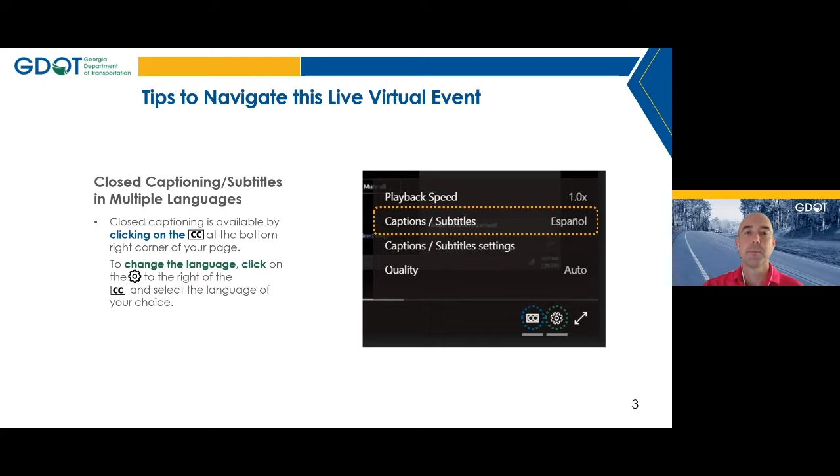Thank you, Kyle, and thank you to everyone for joining us today to learn more about the US 278 and Old Mill Road improvement projects. Let's get started.

As Georgia continues to grow, GDOT is committed to responding when economic development opportunities are presented, or when there is planned growth that requires action to ensure safe and easy access for the traveling public. The US 278 and Old Mill Road improvement projects were developed with those considerations in mind.

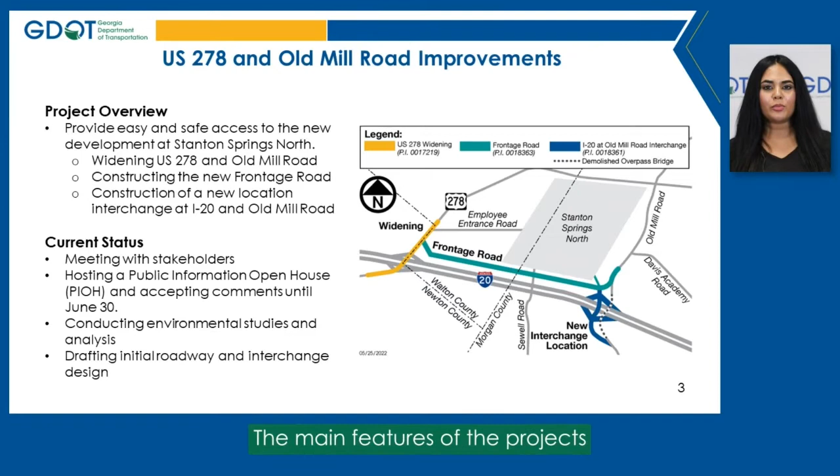These improvements are in response to an economic development opportunity that will increase traffic through this corridor. This package of projects will provide easy and safe access to the new development. The main features of the projects include widening of US 278 and Old Mill Road, constructing the new frontage road, and constructing a new interchange at I-20 and Old Mill Road.

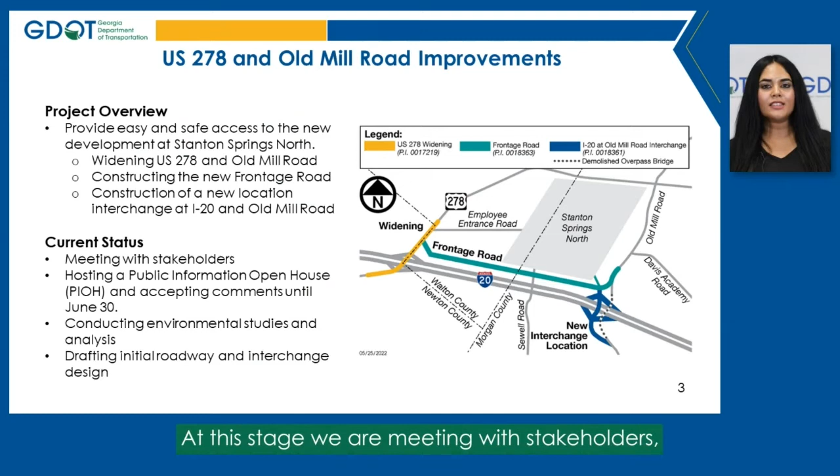At this stage, we are meeting with stakeholders, hosting a virtual public information open house, and accepting public comments until June 30th, conducting environmental work, and drafting initial design concepts.

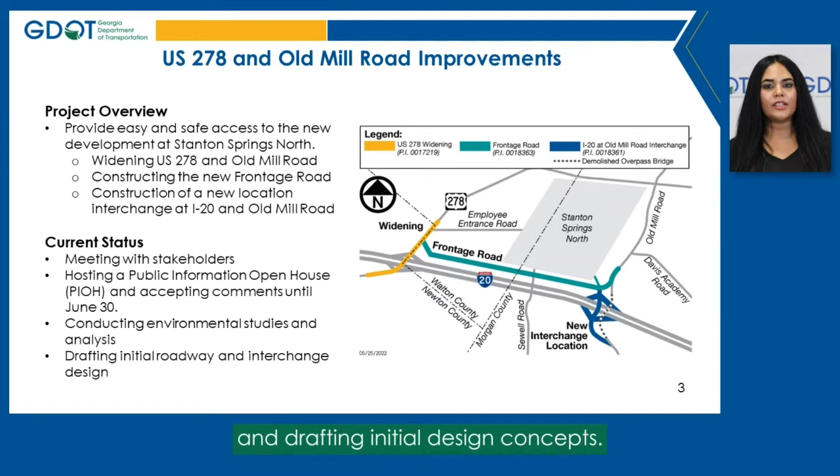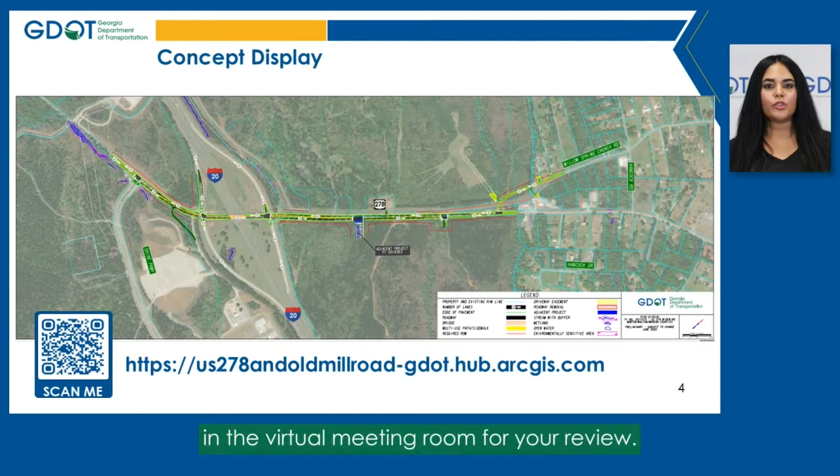Project concepts have been developed, and displays like the one you see on your screen are available in the virtual meeting room for your review. Please take a moment to visit the web address you see on your screen to tour the rooms and view the displays for these projects.

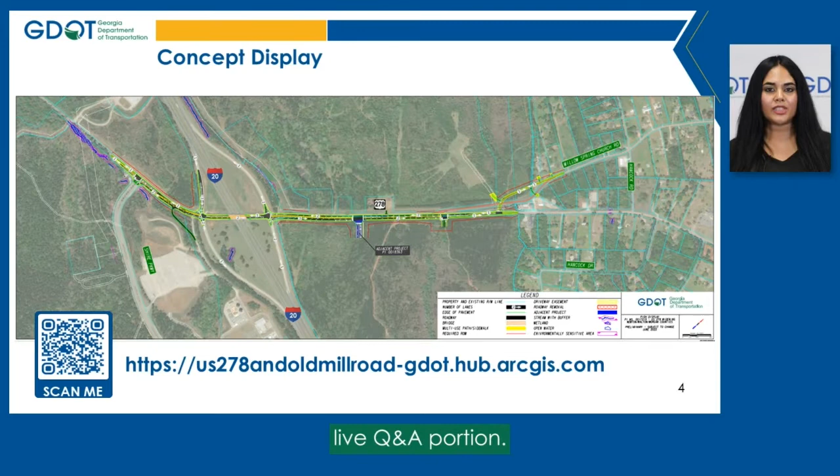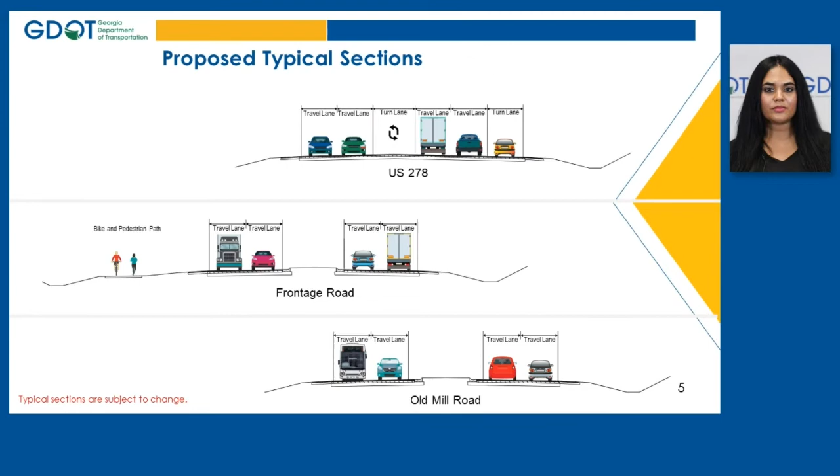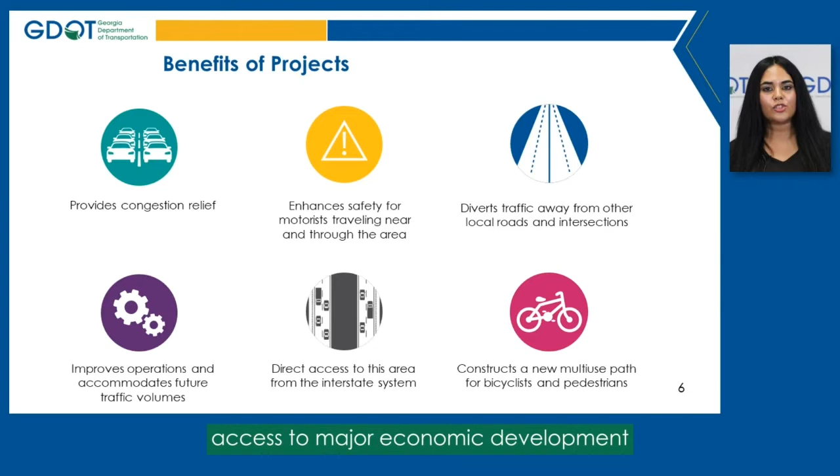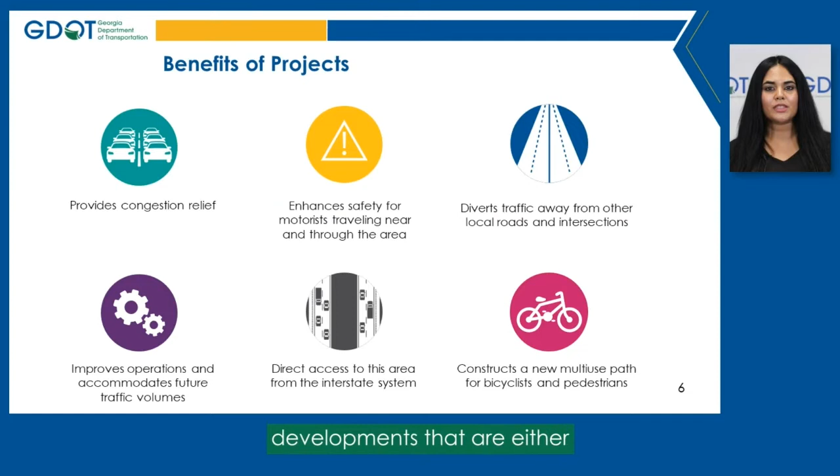These projects offer several benefits to the corridor, including providing safe and direct access to major economic development in the area, mitigating traffic congestion, and creating a new multi-use path within the vicinity. There are multiple private developments currently under construction or planned for the near future, providing thousands of jobs for the region and dependent on optimal access for motorists.

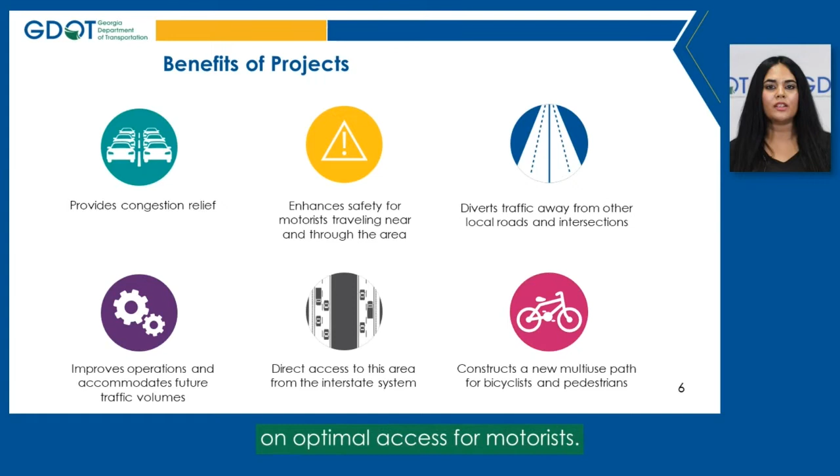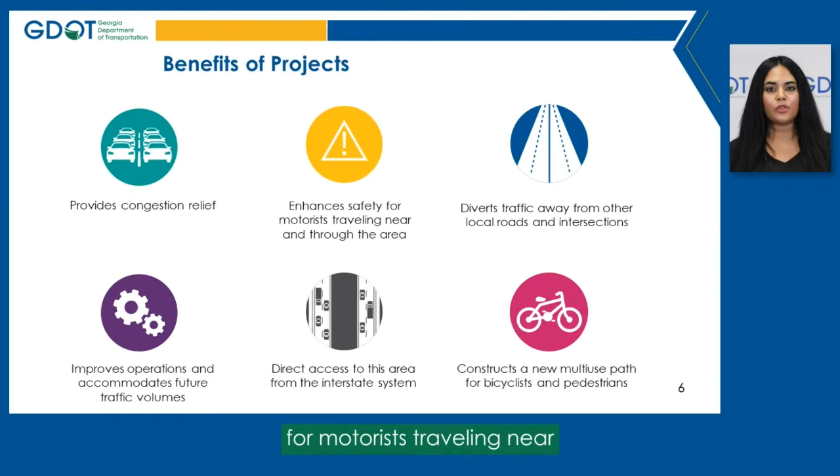In addition, these projects are designed to relieve traffic congestion based on future traffic volumes and will increase safety for motorists traveling near and through the area. The design-build method being used to develop the projects will increase delivery efficiencies and accelerated schedules.

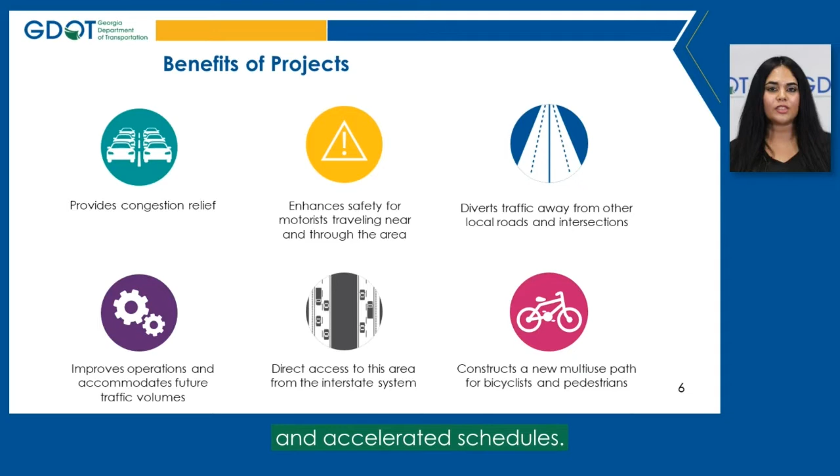All three projects are going through the environmental process and a public comment period, but they're not all on the same timeline for completion. PI 00-17219 and 00-18363 will enter design-build selection in Q3 of 2022, with substantial completion planned for 2024. PI 00-18361 is not planned to go to design-build until a year later, with substantial completion not planned until 2025. The information and dates are subject to change.

Georgia DOT is responsible for reviewing projects and filing appropriate documentation to ensure that all projects comply with applicable federal and state laws and regulations.

Because the Old Mill Road Interchange project, 00-18361, is federally funded through the FHWA, the team will follow the National Environmental Policy Act, also called the NEPA process. The other two projects, 00-17219 and 00-18363, will follow the Georgia Environmental Policy Act, also called GEPA, environmental process.

The environmental and design teams and other subject matter experts meet extensively during the design phase of a project to coordinate the best design options to avoid, minimize, or mitigate impacts to the identified resources. We also conduct public meetings like the one today to allow the public to provide comments on the projects.

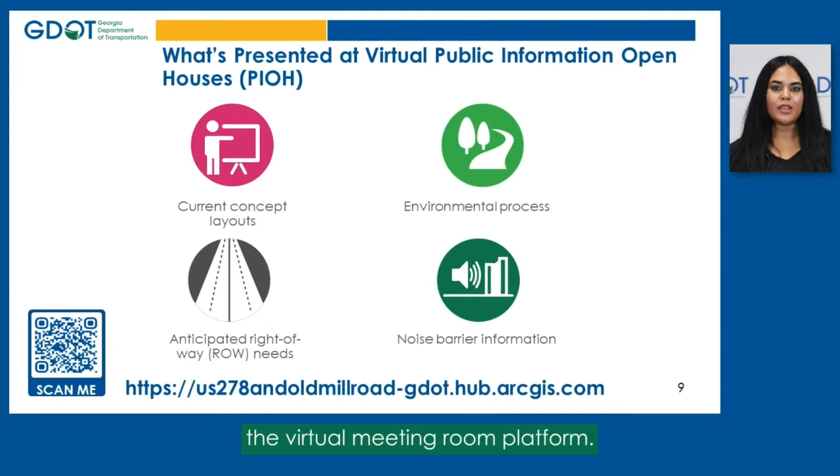That brings us to today, for this virtual public meeting and virtual public information open house. On the project website, we encourage you to visit the virtual meeting room platform. There you will be able to view project information on the environmental process, current concept layouts, anticipated right-of-way needs, noise barrier information, as well as other details. Once you have viewed the materials, you will also have the opportunity to provide comments on the projects. Again, thank you for joining us, and we look forward to hearing from you.

Now we'll go over how to navigate the interactive public information open house virtual meeting room platform.

Thank you, Kathy. As you can see, there's a lot of material for public review and comment. To accommodate this, Georgia DOT has dedicated a website to showcase the concept design, layouts, and other details. The project team wants to ensure visitors have the best user experience, so let's take a quick tour of the project website. First, you will need to visit the Georgia DOT project website for these three improvement projects.

You can easily Google US 278 at Old Mill Road. Click on the first thing that comes up, and it'll take you directly to this page. Once on the website, under the public participation section, click to enter the virtual meeting room to explore stations that contain project informational displays, videos, and design concepts that we would typically share at an in-person style meeting.

Once you enter the virtual meeting room, you will enter the welcome station and be greeted by our statewide spokesperson, Natalie Dale with Georgia DOT. Natalie provides a great overview of the virtual meeting room platform and how best to navigate the space. You might consider starting there.

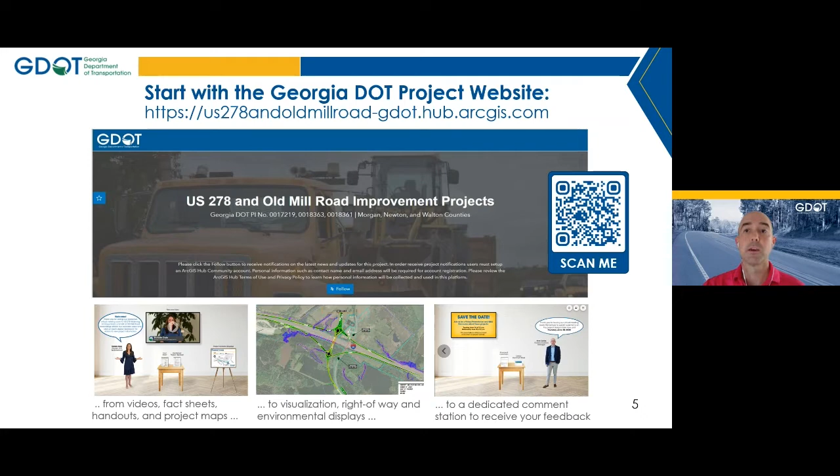The last station of the virtual meeting room provides methods for submitting comments, which is basically why we're here today, to get your comments and feedback. You can send an email, leave a voicemail, or mail in a comment about one or all of the projects listed via the method shown here within the virtual meeting room.

To request materials in accessible formats for people with disabilities, contact the district planning and programming engineer for District 2 in East Central Georgia, Ellen Wright. That number is 478-553-3407. Email is the letter E, Wright, W-R-I-G-H-T, @dot.ga.gov. The department encourages comment on any aspect of these projects.

Robust feedback ensures that decisions are made in consideration of and to the benefit of public needs and preferences.

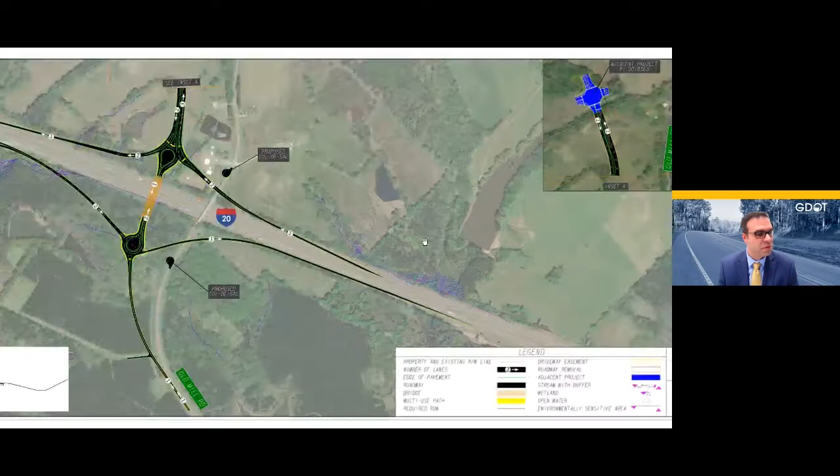So what you see here, if we can zoom into the area for the interchange a little bit, we'll get a closer view of what those lanes look like. You'll see that the Old Mill Road interchange proposed in these layouts is offset just slightly to the west of where the existing Old Mill Road bridge is. This interchange has ramps on each side - it's a diamond shaped interchange, similar to a diamond shape, with exit ramps and entrance ramps on each side. Instead of a standard intersection with a stop sign or traffic signals, there's a roundabout at the top of each of those ramps - two roundabouts, one at either side of the Old Mill Bridge. That's a proven solution used by Georgia DOT and other places throughout the state.

So the first part of this question is what will happen at I-20 and Old Mill as far as the plan for it to enter Old Mill and the frontage road. We've taken a look at the interchange itself. I want to take a moment and imagine if we were a vehicle traveling north along this road, from the bottom of the screen towards the top. What would it be like approaching the new frontage road? Starting at the bottom of the screen, you have Old Mill Road coming off at this new location, and you approach the first roundabout. You would enter the roundabout, move around it, and exit towards the bridge.

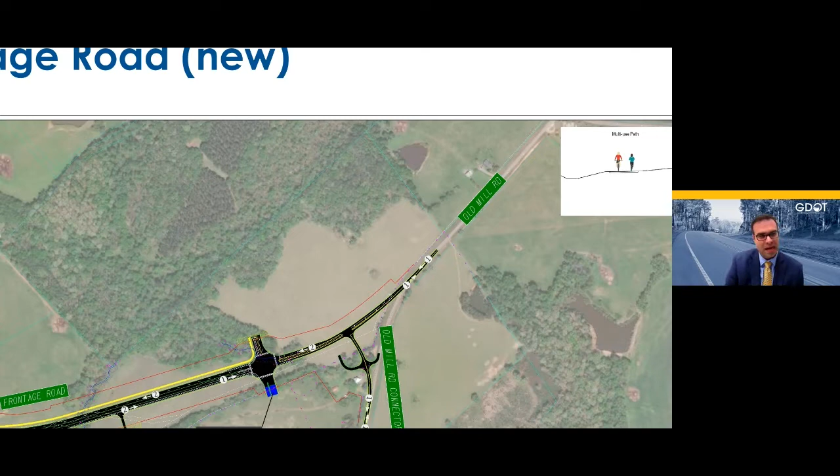Just to the top of where you see that black colored shape, you may see a red line with some jagged shapes where it goes in and out. That red line is our best understanding of where there may be a need to purchase required right-of-way in this area. That means the Department of Transportation would be using the land within that shape to help construct elements of the road—maybe slopes, dirt built up to shape the side of the road, or drainage features needed to ensure water is draining to the right locations and being treated responsibly.

So what you see is that red line showing where any right-of-way is required. That red line is all to the left, or west, of Old Mill Road. On this plot, there is no red line—no additional required right-of-way is currently being shown to the east of Old Mill Road.

To go back to the question that was asked—why does the map look like Rivian or GDOT land goes to the east of Old Mill as it gets close to Davis Academy—I hope we've shown that this current layout and the map Georgia DOT has presented is not actually showing any kind of work, construction, or required right-of-way to the east of Old Mill Road. If there are any clarifications or further questions, please write a follow-up into the chat and we can come back to that. Hopefully this helps clarify where construction is proposed in this area and where there is no construction to the east of Old Mill Road.

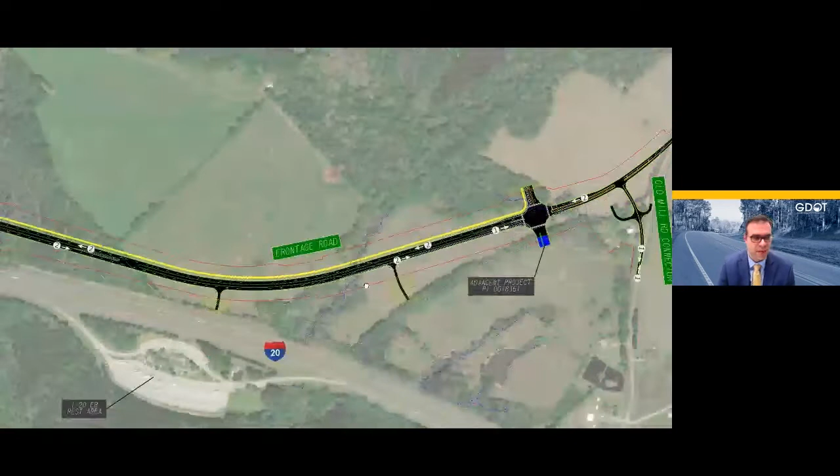The frontage road is going roughly west to east, east to west in that area. So if you were to take a left and head towards the left side of the page, that's taking you towards the 278 route. We'll have an opportunity to do a walkthrough of the full frontage road in a few minutes. But I want to spend some time looking at this intersection and explaining that there will be turn lanes. Depending on which direction you're coming from, there will be left turn lanes so that as you approach that light, you have somewhere to stop and wait to turn left.

It may be a little challenging to see where those lanes are because of how far we can zoom in here, so I encourage you, if you have the chance, to pull up the same layout, which is available on our website. You can zoom into that, download it, and look at it more closely, and that will help you see what will be happening at this intersection and the traffic signal there. Before we complete this answer, in case this isn't the location you were asking about, please feel free to follow up with clarification if there was something different you hoped we would answer. But that's a bit more about the intersection at Old Mill and the frontage road. Thank you for your question.

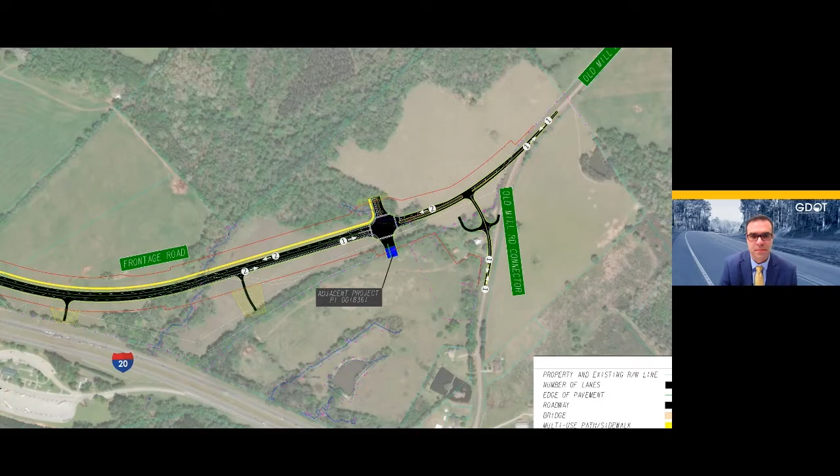Perfect. Thanks, Jonathan. All right, we have a question from Jennifer coming in.

Kathy, it appears that the rest area traffic will now be diverted to the new traffic circle south of the new interchange on Old Mill Road. This will bring even more unnecessary traffic to this area. Were there other options explored before deciding on this design? And is it possible to redesign this aspect of the interchange? So that's pretty much getting back to the Old Mill concept, I believe, and how traffic is going to interact coming from the rest area.

Yes, thank you for that question. I'd like to hand this over to Ty Dennings. Thank you.

Looks like we may be having some technical difficulties with Ty's connection, but I can answer that question for you, Kathy. I've got it if you want to hear. Oh, I think he's back. Okay, sorry, all right. So yeah, could we switch back to the Old Mill interchange again? We're talking about the rest area. So the question is, why is the rest area traffic exiting onto that ramp and then going through the proposed roundabout?

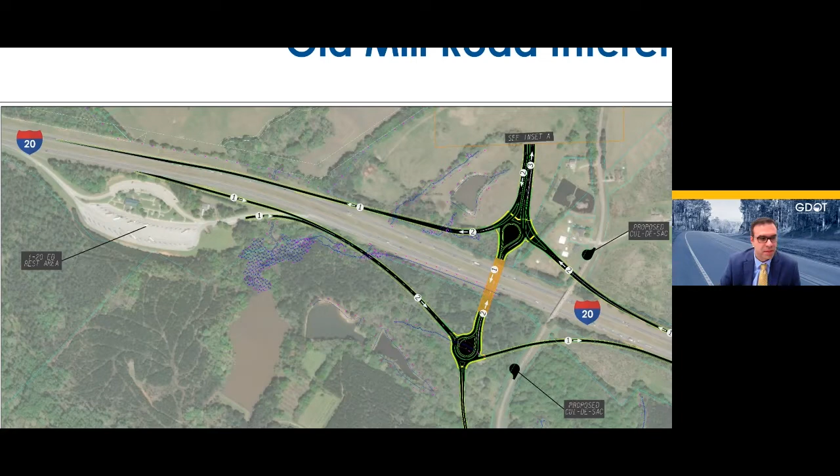As we look at this area, we see that the improvements along Old Mill Road do not go any farther north than this roadway shape, shown in black here. Where the existing Old Mill Road ties into US 278 is much further to the north. If you were to continue beyond this project, you would first continue a ways past Davis Academy and then on to US 278. For the sake of this project, all construction to the north on Old Mill Road ends at this location on screen, well south of Davis Academy. It does not extend all the way to 278.

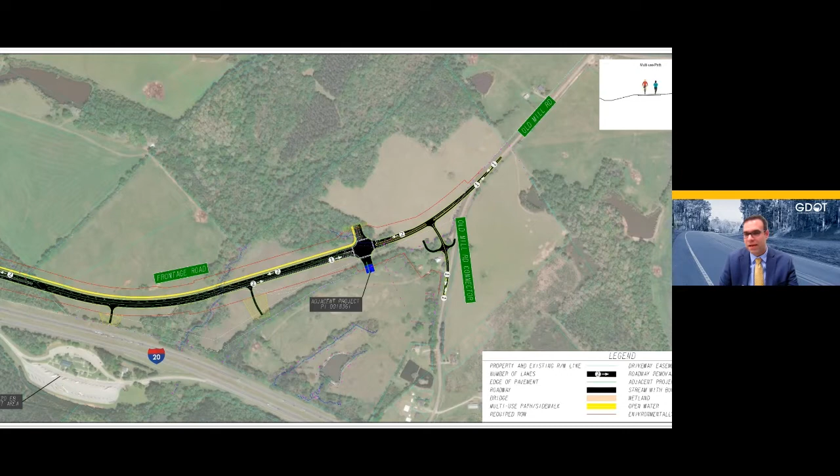Now, just in case, to cover our bases, if part of the question was about accessing US 278 from Old Mill Road, there is a new additional way to access US 278. If you were at the frontage, at Old Mill Road, and you were to exit I-20 at this new interchange wanting to go to US 278, you could take the frontage road, turn left, head west, and that would take you to a new intersection at US 278. That's one of the operational benefits of having this new frontage road — it provides a new connection to US 278, parallel to I-20 but to the north, as shown here as you approach 278. Hopefully that answers your question. Thank you for sharing that.

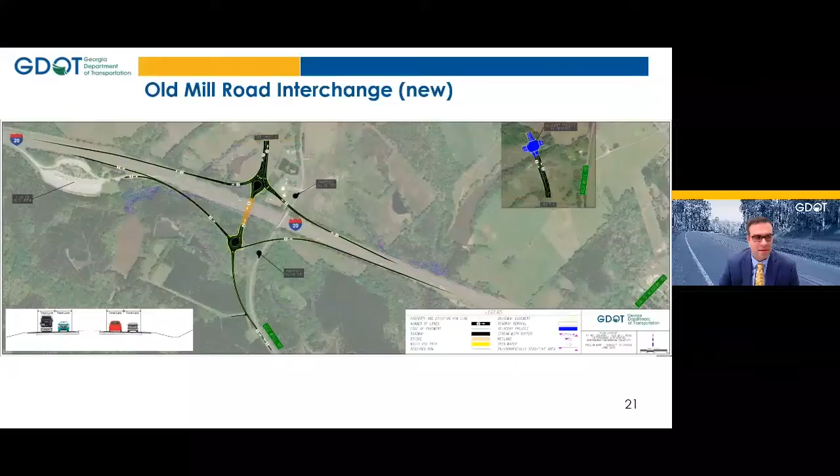All right, thank you. We'll go ahead and put the slide back up on the screen so we can talk about it. I do understand the question now, so thank you for helping to clarify for us. As we zoom in on the area towards the interchange, I believe what you're saying now is that there are ramps on the east side or the right side of this interchange that are crossing over where those existing roadways are for Old Mill Road. And there's one on each side of I-20.

So those ramps are coming through where that existing roadway would be. I believe that question is about where those ramps will be in proximity to the existing roadway. So I want to use this as an opportunity not only to answer that question, but to elaborate on what is happening with the construction of the new bridge versus the existing bridge in that location.

As we look at this on the right, you see in the aerial the existing Old Mill Road and the existing bridge that goes over I-20. That bridge is not large enough or sufficient to become the interchange without being widened or significantly reconstructed, so that existing bridge will not remain in place in the final condition. But what about while the new bridge is being constructed?

The plan while the new bridge is being constructed is that the existing Old Mill Road and the existing bridge will remain open, so at all times, even through construction, Old Mill Road will continue to have access across I-20 to the areas you currently drive to. Once the new bridge is completed, that new location can be opened - that's the drive we imagined earlier, through both roundabouts on the way up to the frontage road.

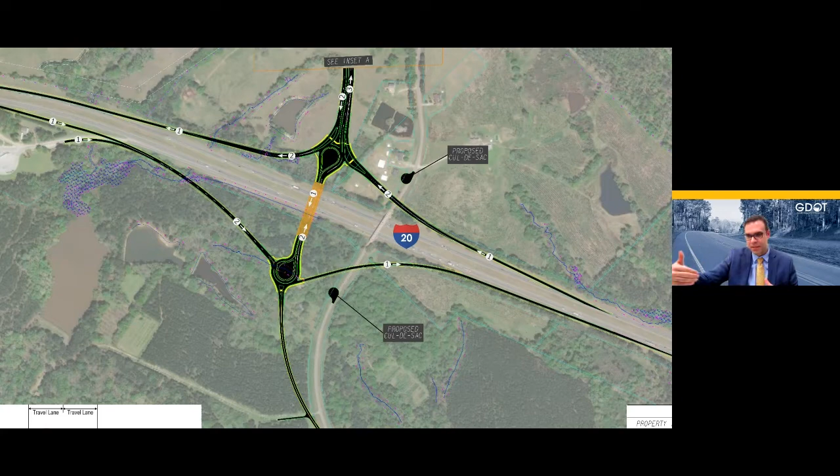That's what we anticipate. Hopefully that answers your question, and thank you for clarifying - it's not going to be a situation where those ramps are on a bridge going over those connections. They will be at grade and built as they come up to the new interchange, and the existing Old Mill Road will no longer be in that location because the road will end at those cul-de-sacs. Hopefully that's a good explanation, and thank you for clarifying.

Thanks, Jonathan. We have additional questions here. I understand that the Stanton Springs / 278 exit will be reworked - it is really dangerous as it is. I'm glad you asked that question, Ms. Jenkins. We can go ahead and queue up the 278 end of the three projects that we presented.

And Kathy, you want to get Jonathan to maybe walk through that? Yeah, sure. Thank you for your question. Sure, Jonathan, you can walk through it. Sure, I'd be happy to.

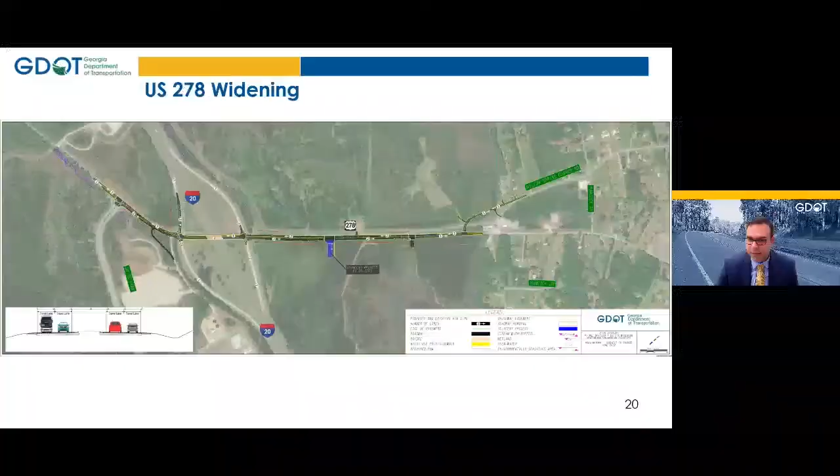I think we were going to queue up the screen so we can take a look at that US 278 side. And when I'm done talking through this walkthrough, I also want to give Ty Denning, one of our design experts, an opportunity to elaborate if there's anything else he wants to share from that deeper design perspective about the question, because the question was safety related, and we want to be sure we both have opportunities to talk through that.

So what I'll start with is one of these imaginary drive-throughs like we were doing a moment ago, and this time we're going to do it at US 278, starting on the left side of the page. Before we get going, I just want to clarify something as you're looking at this, because it could be confusing.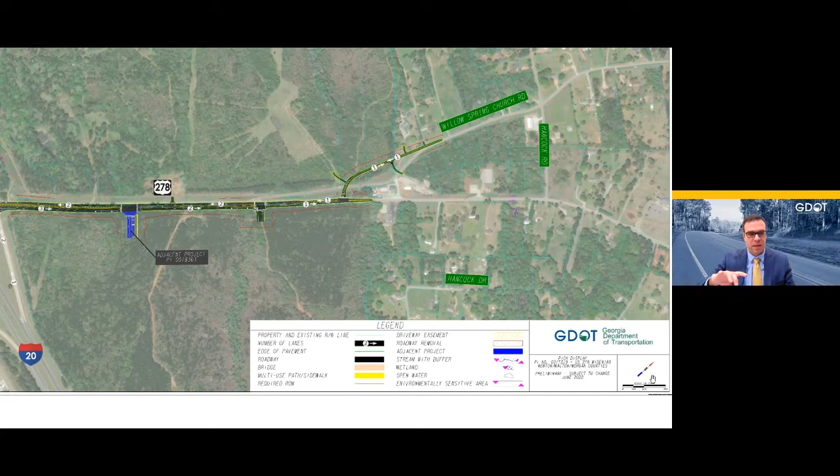The road that you see here is rotated in a different direction than the other layouts we've been looking at. So all the other layouts we've looked at, north is pointing up, but because of the shape and alignment of US 278, it's easier to show this on the screen as it's rotated. So the direction north is kind of towards the top right side of the page.

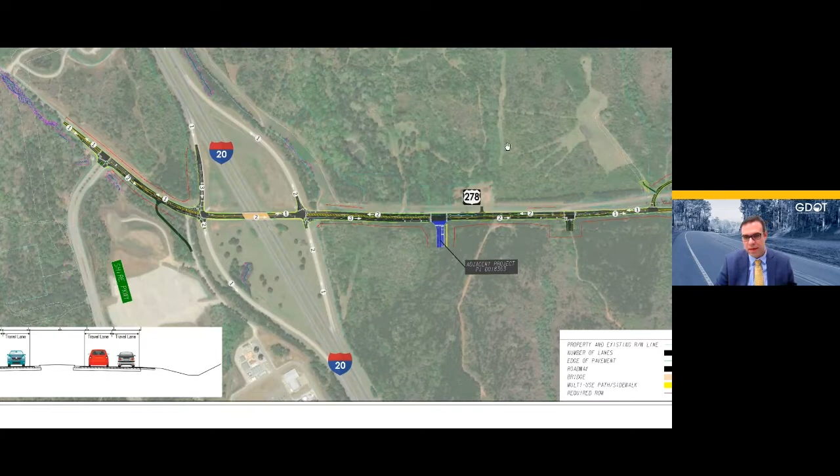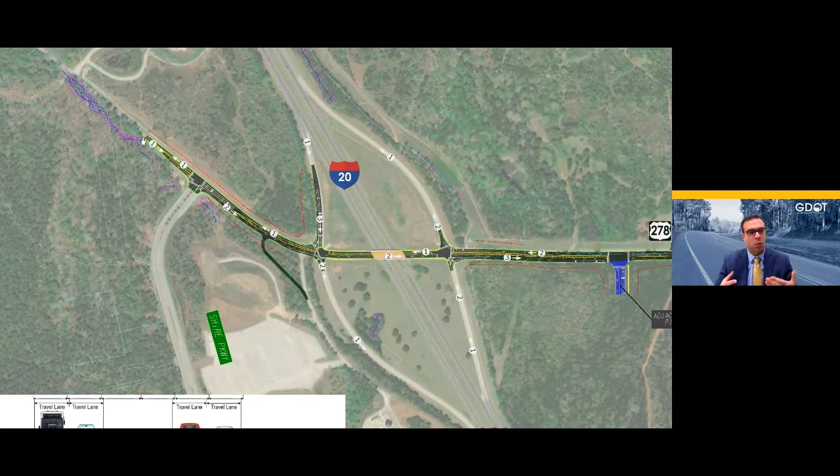When you're looking at 278 and we're talking about traveling north, we're going to be going from left to right on the page here. So as we start on the left side, we're going to start just south of Shire Parkway. And this is going to give us the opportunity to widen from 1 lane in each direction out to 2 lanes, ultimately, in each direction.

But you'll want to look closely at the little circles we talked about earlier with the number of lanes. So as we move towards the right, towards the north, in that northbound direction, if we're driving towards the interstate, it widens to 2 lanes. Now the southbound side is still just 1 lane, and there are some turn lanes in between. People turning into Shire Parkway or other parts have places to turn, and that creates the space for those turn lanes.

We'll continue driving north towards I-20, passing Shire Parkway and a driveway, then approach the interstate ramps at I-20 and US 278. In this location, the majority of the work is being done on US 278, and only a very small amount is being done on these existing interstate ramps.

If you remember a few moments ago when we talked about what the different colors on the map mean, the dark gray color is where we anticipate roadway construction. So you see the construction really doesn't go very far up most of those ramps.

Now the ramp at the top left, which is the Eastbound Off Ramp - if you were coming from Atlanta and getting off in this location, you see there's some more construction on that ramp. The reason for that additional construction is purely to add an additional turn lane. The number 3 means there are 3 lanes, which will be turn lanes so you can choose which direction to go as you come off that ramp. There would be plenty of space for people to take a left turn from that ramp onto US 278, which is pointing towards the right once again.

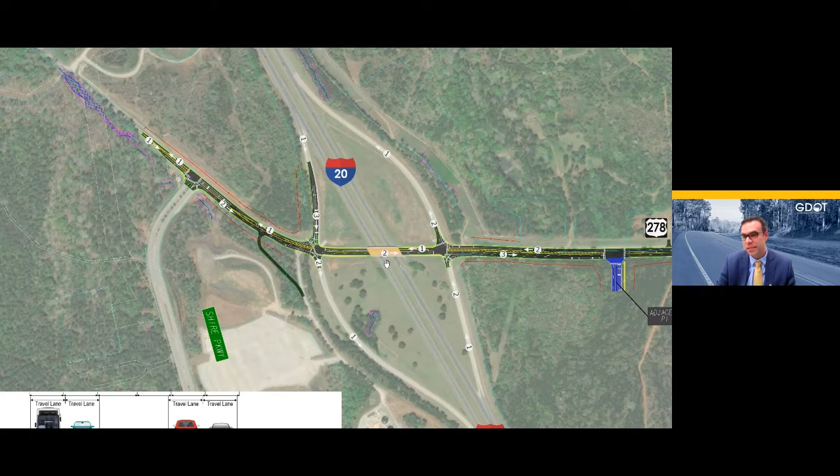For those of you familiar with this area, driving across that bridge, you know on one side of the road there's a large area that's not currently being used. There are some stripes there, outside the area where you'd be driving. This bridge was constructed at one point with enough space to accommodate the lanes we're going to be putting here. So this bridge does not need to be reconstructed, it does not need to be widened - it's the same bridge that's already out there. We're just using that extra space that's not being used right now.

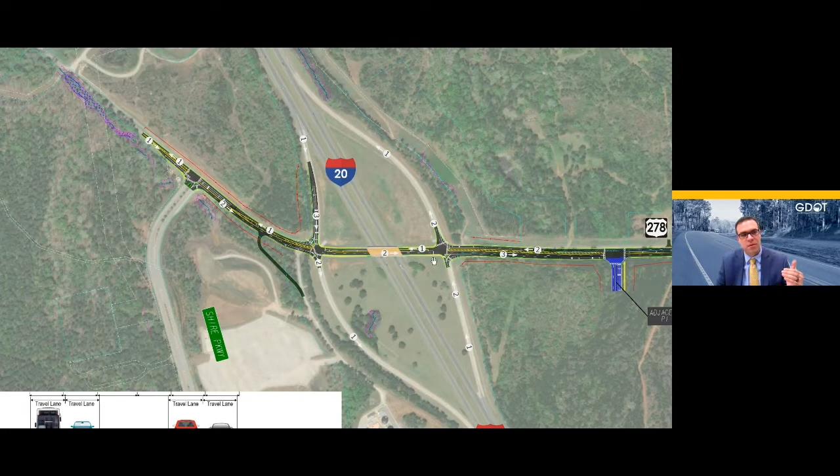As you continue across that bridge, you get to another intersection - these are the ramps from the other direction, the westbound ramps, both exit ramps and on-ramp. Continuing further north, again to the right, you see the number of lanes changing. There's a little 3, because there's a turn lane in that area between the ramp and the frontage road we're about to get to.

So someone could pull into the right, into that turn lane, make a right, and that blue space you see in the next intersection - that blue area - is the new intersection with the newly proposed frontage road.

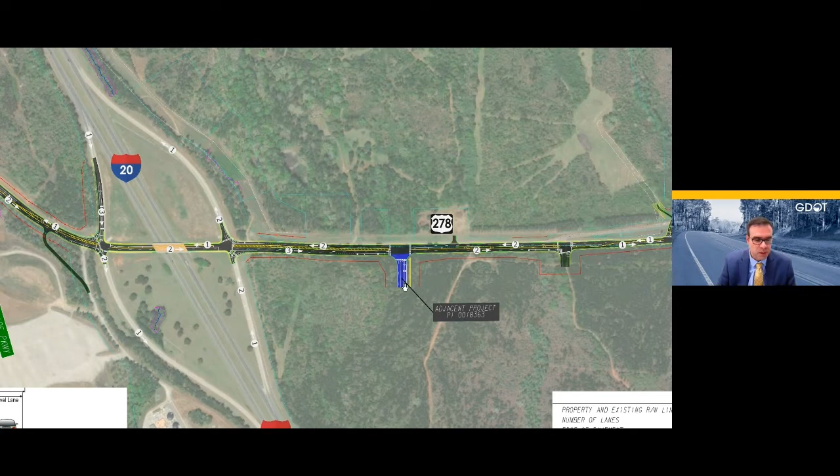That frontage road is proposed to connect US 278 all the way back across to Old Mill Road. Now, if we continue to the right, which is also to the north, we continue with the widening of 278. There's another intersection you get to here, and that's a proposed entrance to the new development coming in that area, providing access to that development.

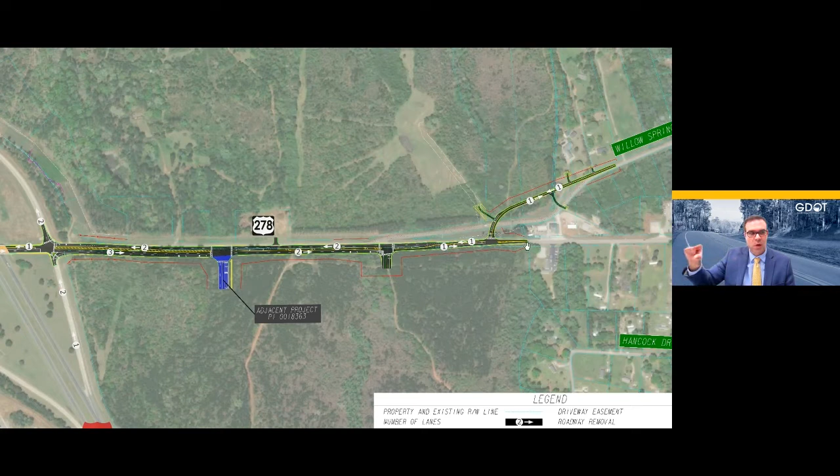As you continue further, you see those little circles go back to a number 1, meaning we're now going back from 2 lanes down to 1 lane and tying back into the existing road. The last thing you see right before we tie in is the new location of Willow Springs Church Road, and there are some improvements to that intersection as it ties in at a bit safer angle, making it more conducive to the traffic moving through that area.

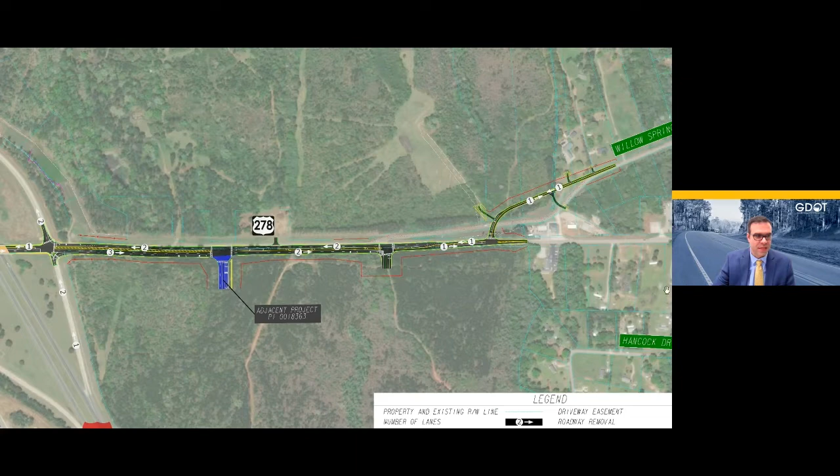Now you see the far right side of the page where the construction ends on US 278. The plan is that this layout ties in before we get to those properties where they're developed. I think there's a church there and some other businesses in that location, so that's all tying in just before we get to that area.

So that's what I wanted to walk through in terms of a high-level drive through of the area, talking about some of the features there. I said at the very beginning that I wanted to give Ty Denning an opportunity to talk a little bit more about the other parts of this question, maybe some more detailed explanation, and touching on some of the safety. So Ty, I'll hand it over to you to round out this question.

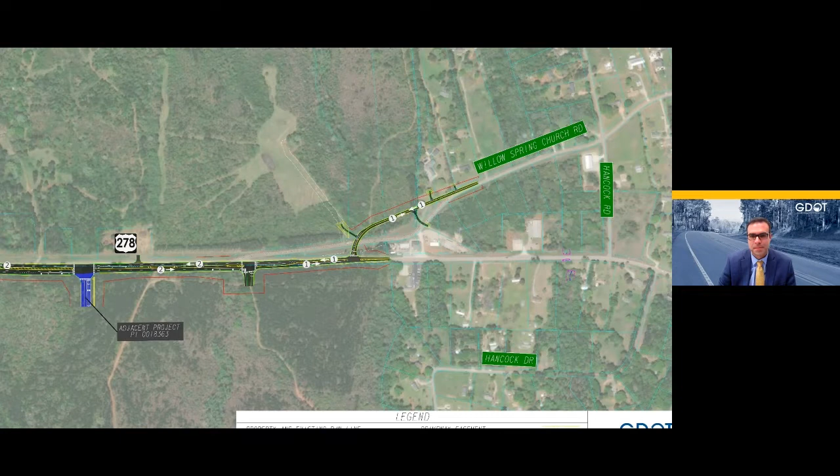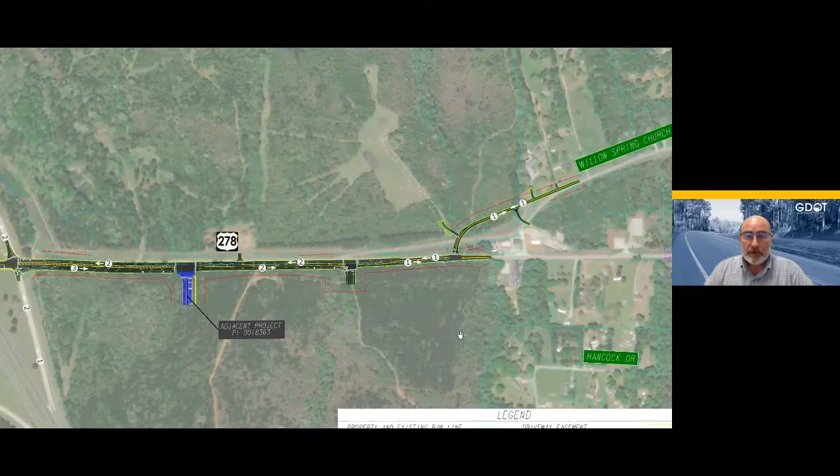Sure, thanks Jonathan. As far as the question about safety, we would definitely encourage you to leave a comment for us. We'd like to know if there's a specific safety concern you guys have seen historically—definitely something we'd like to look into. But by and large, the improvements being made to the ramps at I-20 are to address some of the increased traffic that's anticipated.

As you can see on that drawing, the eastbound off ramp, the top left ramp, is being widened to 3 lanes, and we're adding a double left turn lane there. But in addition to the ramp widening, we're also adding traditional traffic control signals at both the eastbound and westbound intersections there. That in and of itself will help protect some of those movements. If there are sight distance issues, that will also help mitigate or eliminate some of that, because you'll have protected movements on a green arrow or whatever.

But by and large, those signals should greatly help some of those safety concerns. You won't necessarily have people flying down US 278 across those intersections—they'll need to stop at the signals. I don't know if this has been mentioned specifically, but they're also adding a traffic signal south of there at Shire Parkway, so some of that traffic seen around that area will also be a little better controlled.

I hope I answered that sufficiently for you, but thanks for the question. Yeah, great stuff, Ty. And Jonathan, thanks also for helping clarify what's going on with 278 and why.

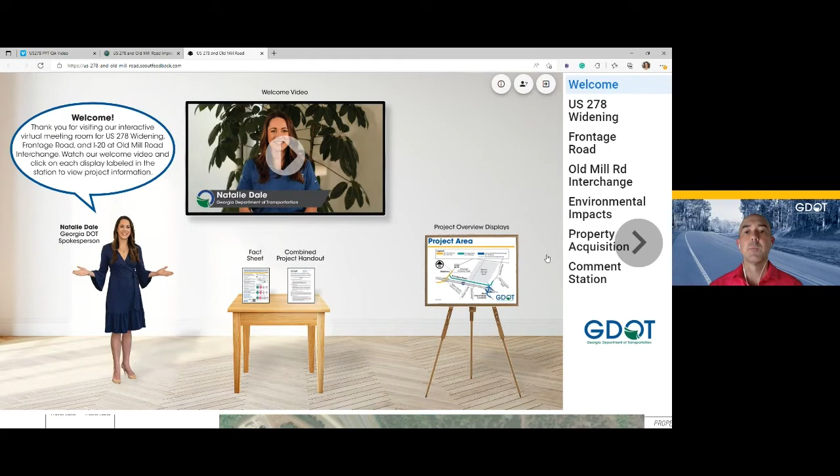You can also click on a fact sheet. You can see a combined handout, which is going to have basic details, a lot of what we've been describing today on the current conditions, what we think the conditions are going to become, and what the improvements are going to be. Definitely look on the right side of the tab, like Phil Copeland was talking about earlier as it relates to interest with property acquisition. But let's start with the 278 widening.

So we'll click on that. You just get kind of a general rundown and reminder. Again, you can do this on a laptop, desktop, or on a mobile device. It's optimized for a phone as well, so don't worry about that. You see our program manager, Marlo Clowers, for design, build, alternative delivery. We're all shrunken down people on the site, sort of welcoming you in just like it was in person. You see the typical sections there, and the concept that Jonathan and Ty and Yop have been describing thus far. So just for example, this is the first project on 278, so everything you need to know is in here.

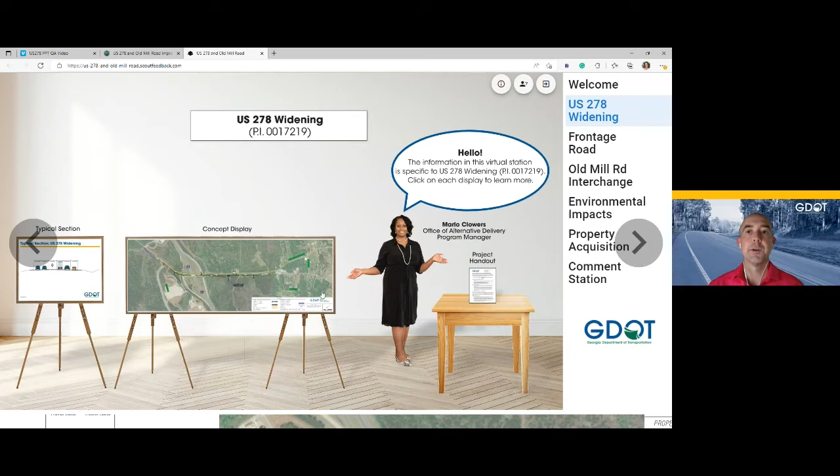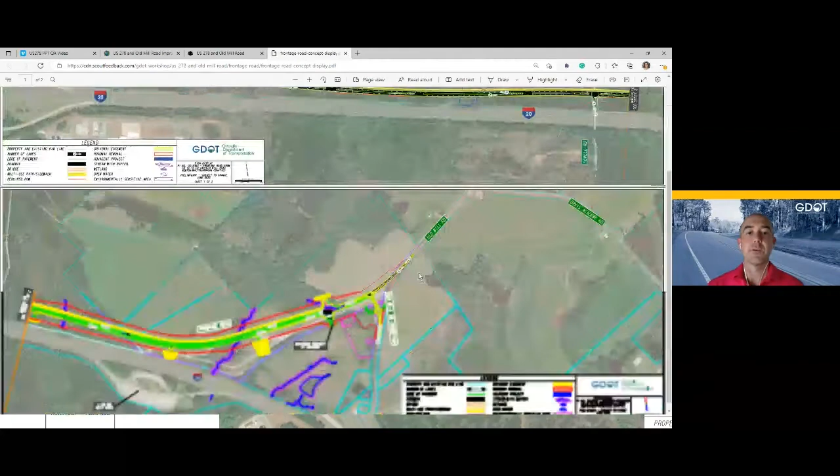Then we'll go to frontage road. Same kind of deal, just reminding you, and that's Kathe Ahmed, who you've seen and heard from in the video and also during some of the responses thus far this evening. She's walking you through what's happening on frontage road. So you've got the concept displays, and it's very easy to click and download these to view anytime. This website will remain live.

It just stops accepting comments after June 30th. So that comment period is June 1 to June 30th. Please visit during that time, but it will be available afterward to go back and review any of these displays and information.

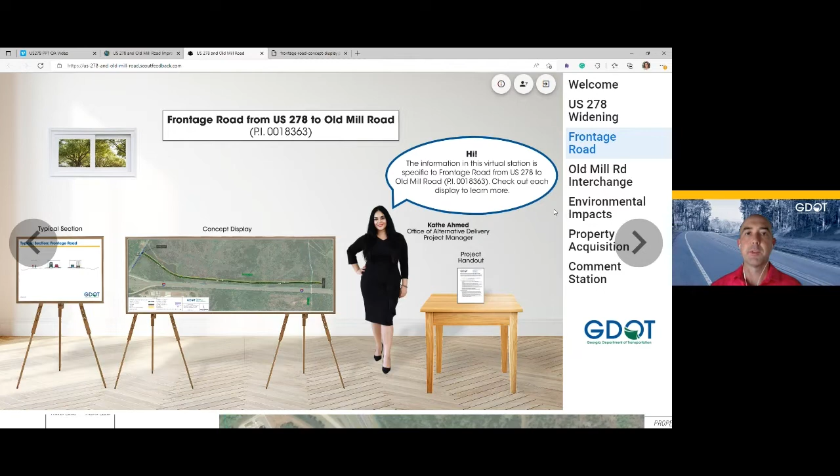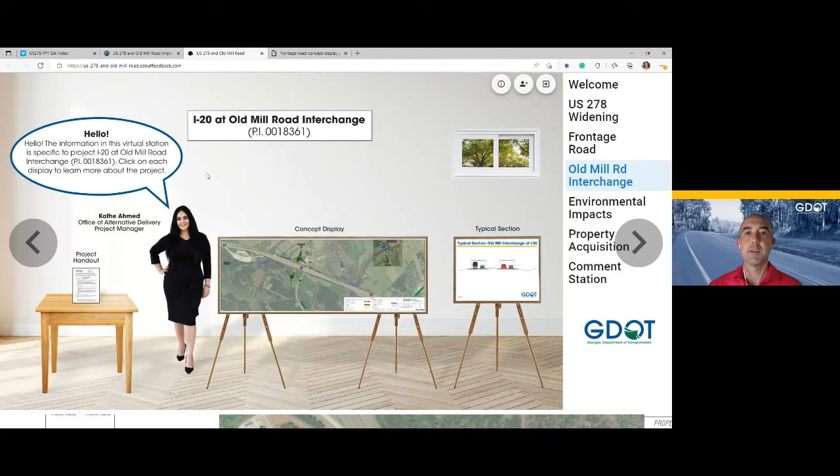So about 30 to 40 days after this period is over, we're going to take all the comments that we've received, analyze everything, and try to get you the best information back to your questions. That letter will also be published on this site, so that'll be something to look out for in the coming months as we respond to your inquiries.

And it looks like we got some new questions, so that's awesome. We'll try to get to those.

Okay Kathe, are there projections for how these road alterations are going to benefit the local economy? Bring in how many construction jobs? So how would we like to address that one, just on the impacts to the local economy, Kathe?

Thank you for that question. I'd like to hand that over to Jonathan. It will be bringing jobs to the local economy, but I'd like Jonathan to elaborate more.

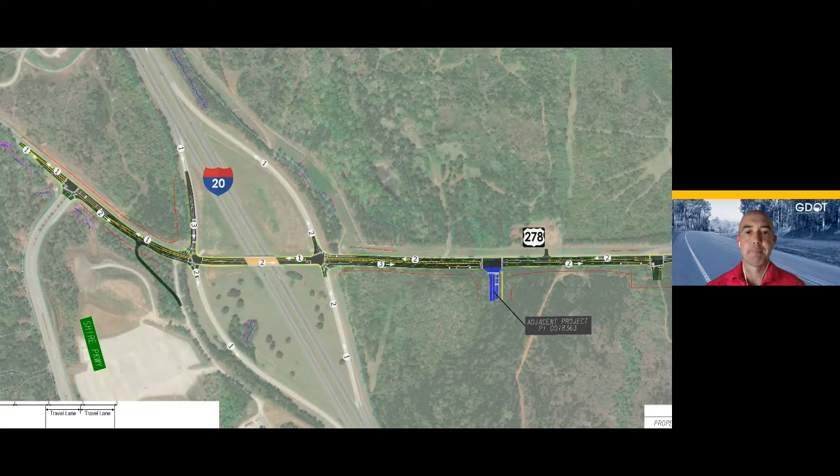So we talked a little bit about this, about how the new Old Mill Road is going to tie in with the signalized intersection, also in allowing normal citizens to drive through, but also servicing the new development. Kathy, could we just kind of walk through how this is going to work in unison with the plans at Old Mill and 278 to be a package for safety and traffic flow?

Yeah, sure. Since we have a little bit more time left, we can walk through it. I think Jonathan will help us walk through this.

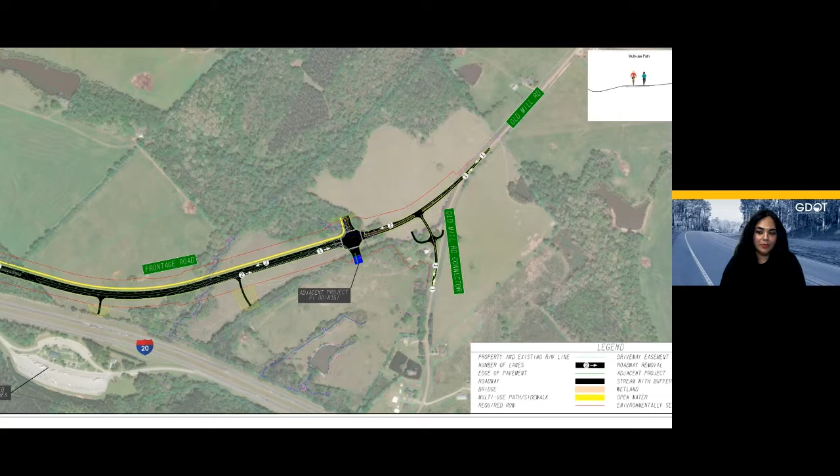I would be happy to do so. And we've already got it pulled up on the screen here. For this discussion, let's start on the slide where we are now. We'll start on the right and work towards the left. So right now we're going to go west, heading in the westerly direction.

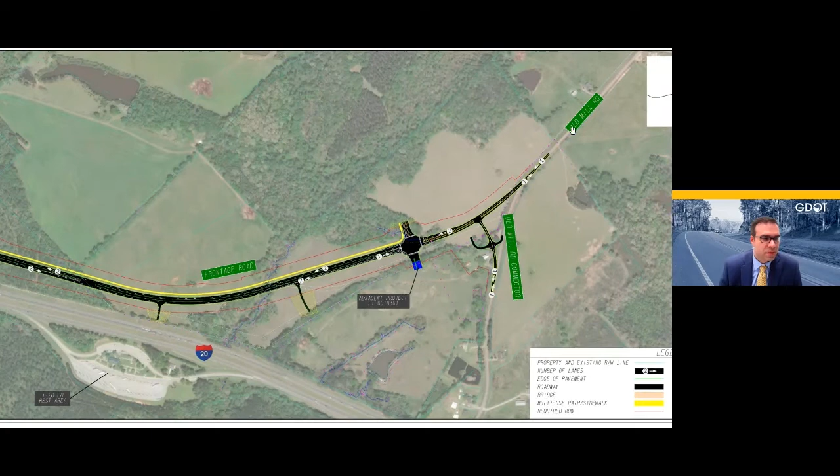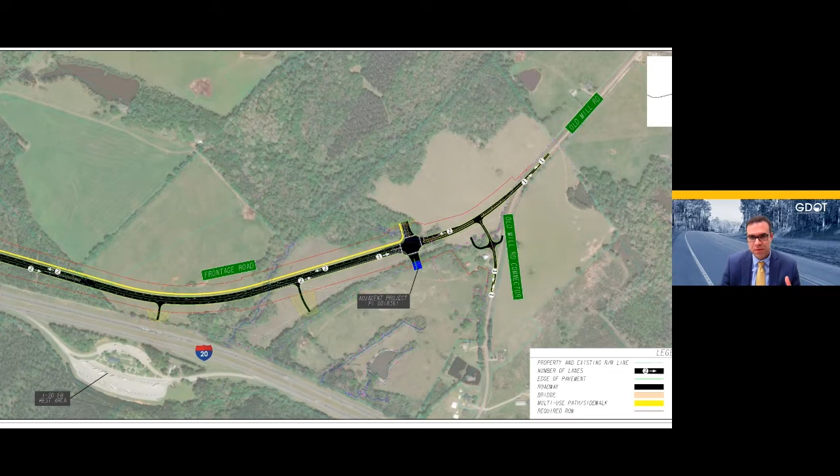We've talked a little bit about the other roadways, but we haven't talked specifically about how this new frontage road is configured. Let's go to the very top right of this screen. We have something called a typical section. That's just a fancy engineering term for how many lanes are going to be out there. This is just a picture, almost as if you took a slice out of a cake, right out of the middle of the road, looking right down the road, and you see how these lanes will be laid out.

So for the frontage road, we've talked about how we want to ensure there's enough capacity and that we're considering safety. How did we do that along the frontage road? Well, you can see here that on each side of the road we have 2 lanes, so there's 2 lanes in each direction. In between those 2 lanes, there's a raised median.

And then on the far left side of what we're looking at here, you see there is a sidewalk. That's not just any sidewalk—it's an extra wide sidewalk called a multi-use path. The reason we use that term is that you can have different kinds of users, different kinds of people using it. So you can have pedestrians who are walking, cyclists who are riding their bikes. The sidewalk itself is wide enough that you can have multiple different kinds of people using it at the same time.

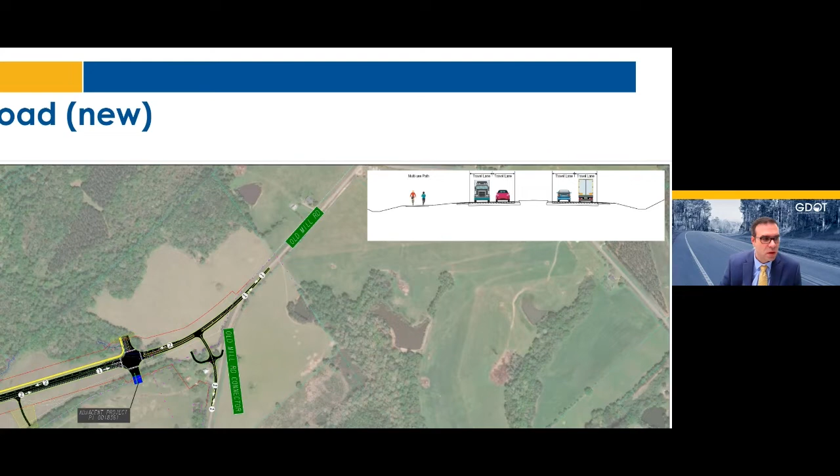How does that translate into the frontage road we're looking at further to the left? When we look at that dark gray shape, you see there's a light yellow line along the top side of that shape. That's where the multi-use path will go. If you're questioning which side of the road this multi-use path will be on, it is not between I-20 and the frontage road—it is on the other side, where the development is going to be, on that top side of the page.

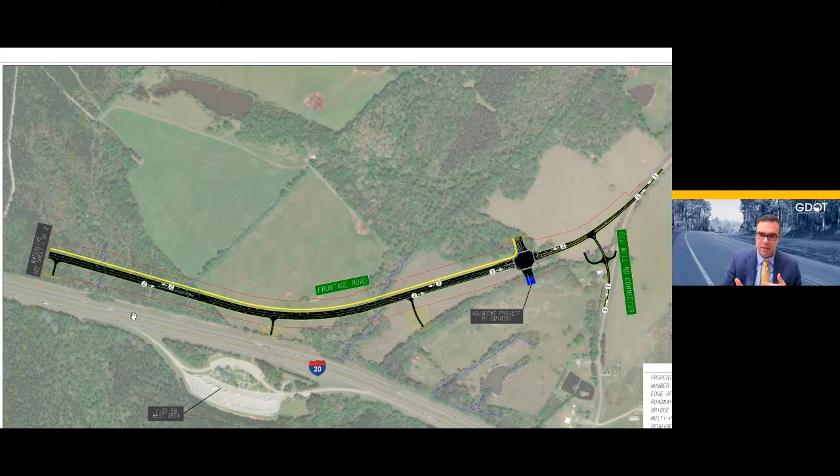So you can see that typical section, or the number of lanes we talked about, is consistent throughout this whole frontage road. As we travel towards the west, you've got 2 lanes. As you make that trip, you're passing some driveways. There are breaks in the median, where it stops and allows people to pull in—they could take a left on a driveway, or even make a U-turn and go back the other direction. Very quickly, if we flip to the previous page, you'll see how this layout continues.

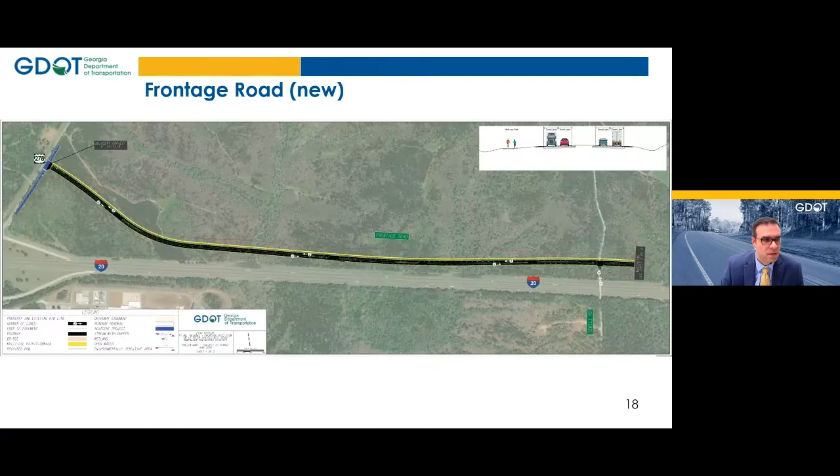It continues parallel to I-20. You pass Sewell Road, which is the existing bridge that is out there. I'll just make a note for anybody listening that there is no work being done on Sewell Road, and the bridge at Sewell Road over I-20 is not being touched at all—no construction, it's not being removed, it's not being touched at all.

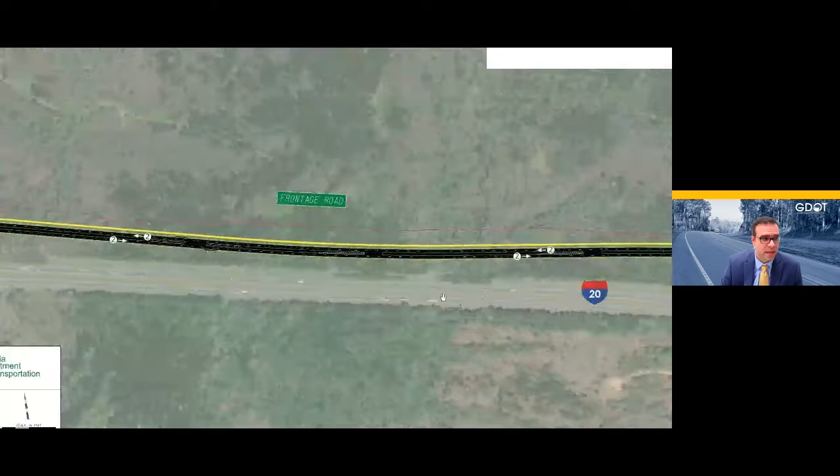So we continue to the left, which is west along the frontage road. As we continue, we pass some breaks in the median, some potential locations for driveways, and we curve right back around to US 278. In summary, this frontage road is going to be a brand new connection parallel to I-20, connecting 278 and Old Mill Road, and providing one more means of access between those two locations and to any properties along that frontage road in between.

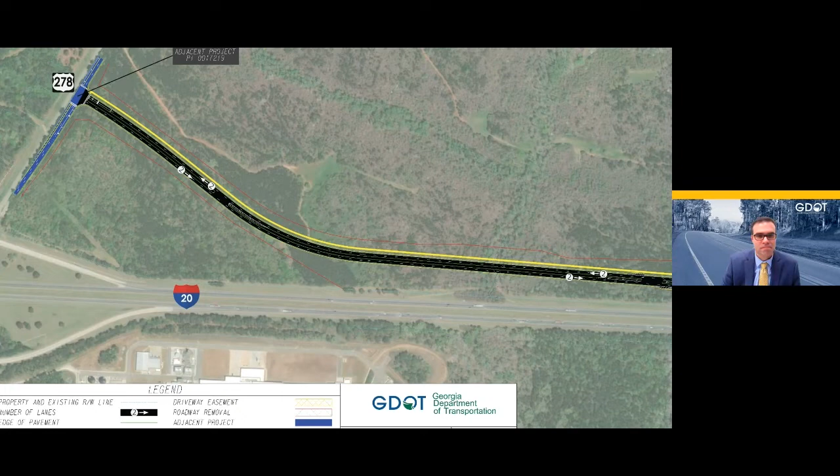Thanks for the opportunity to talk through that. Kyle, I think I'll hand it back to you.